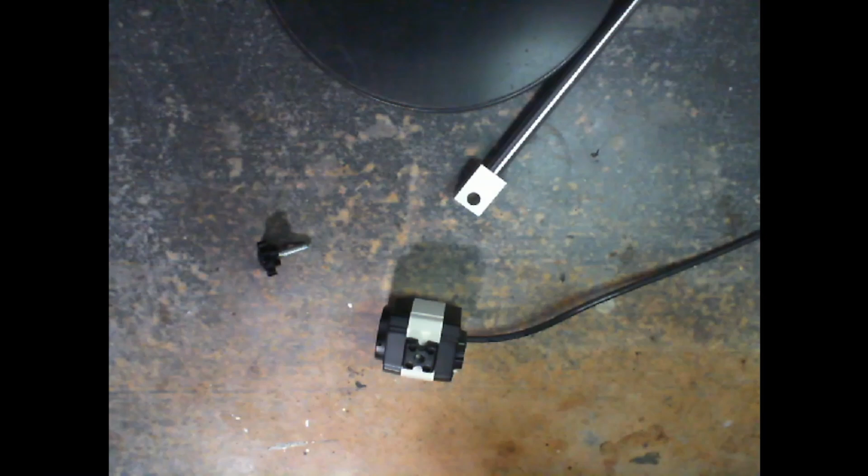In this video, I'm going to be going through how I use FreeCAD and 3D printing to solve everyday problems with my stuff.

My problem here today is that I have this USB document camera, and the way it hooks up through the back, it has to be oriented so the document appears upright. So we have this place to mount it on the back, which is what this stand that came with it was intended to do.

You can also flip it so it's horizontal instead of pointed down at a desk. It has this mounting point at the top, which is kind of intended to be used like that. However, every now and then I'd like to put this on a tripod, like if I'm trying to capture a time lapse of a print, or if I need a camera for anything else. This is my go-to. But if I flip it over, it doesn't have a place to mount on the bottom, so I can't just stick it onto a tripod and call it a day.

I want to make something so that I can attach it through the top and then attach this thing I'm going to design onto the tripod itself. So how are we going to do that?

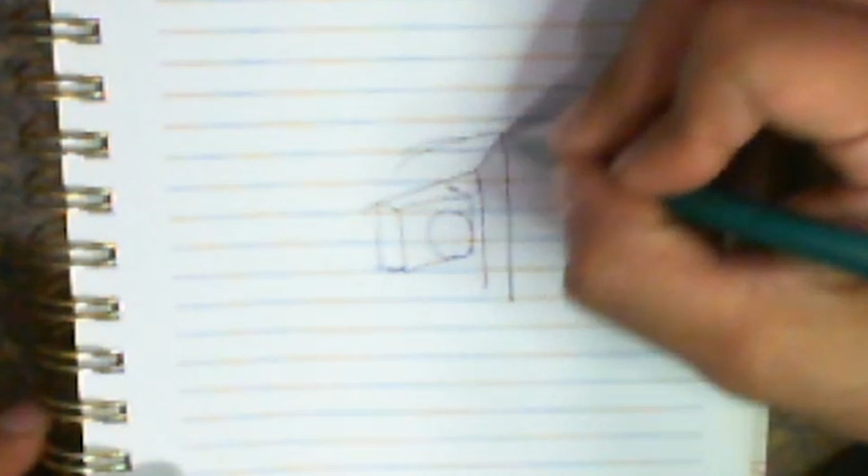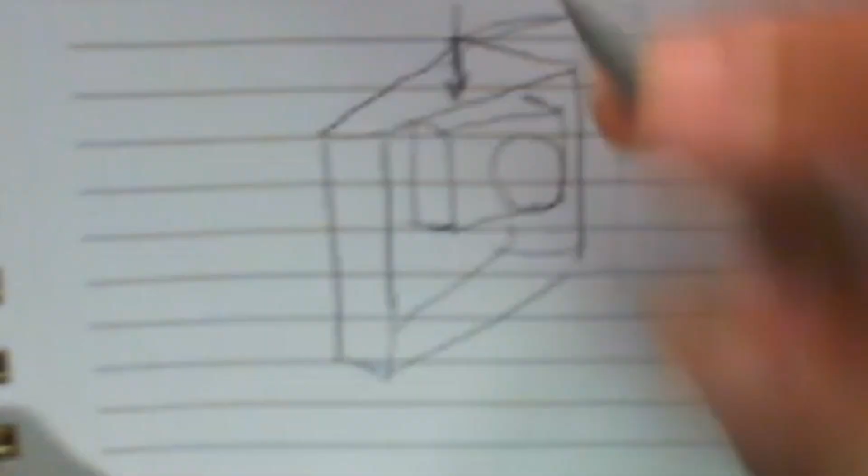Basically my idea is if I have the end of my camera, I want to make a frame that will go around that, just like that. Then I'll have a place to mount my screw on the top, and on the bottom is where we have our tripod. I'll just draw that there.

Let's take some measurements for the camera first. That's the width, I'm going to go 43, and for the height it falls at around 47. For the depth, that doesn't really matter.

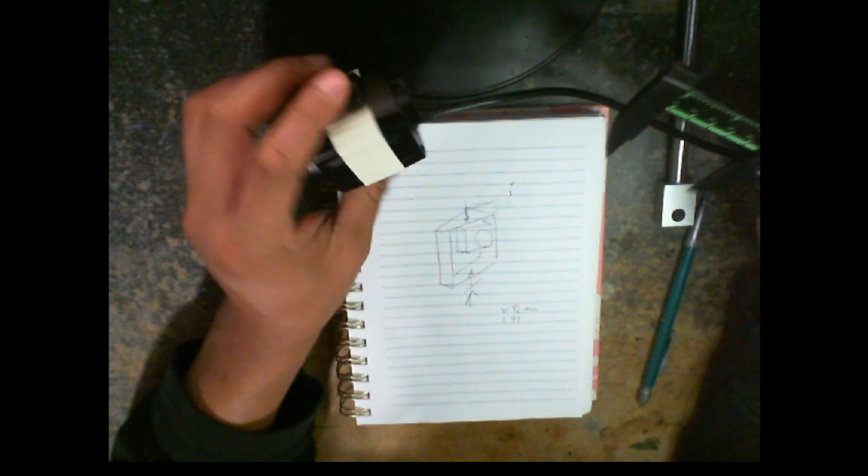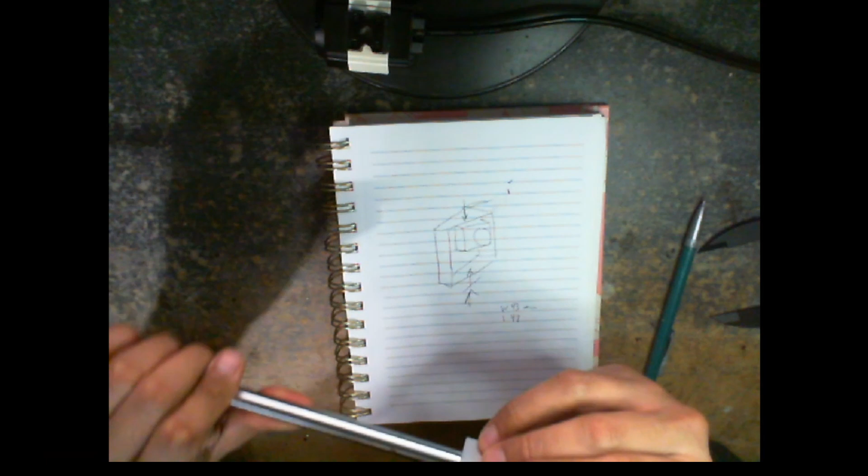But what does matter, and what I'm trying to base it off of so I get the best chance of this being compatible, is this piece right here. It actually looks like it's attached by a hex wrench, but I don't have to take it off, honestly. I can just measure a couple of things here.

I'm getting 19.5, I'm just going to round that up. Then I'll measure the height, and it's about 14.5, or I'll just call it the thickness, actually. The length we'll have to calculate from a combination we'll get to here in a second. I want the diameter of this hole here, which appears to be 8 millimeters.

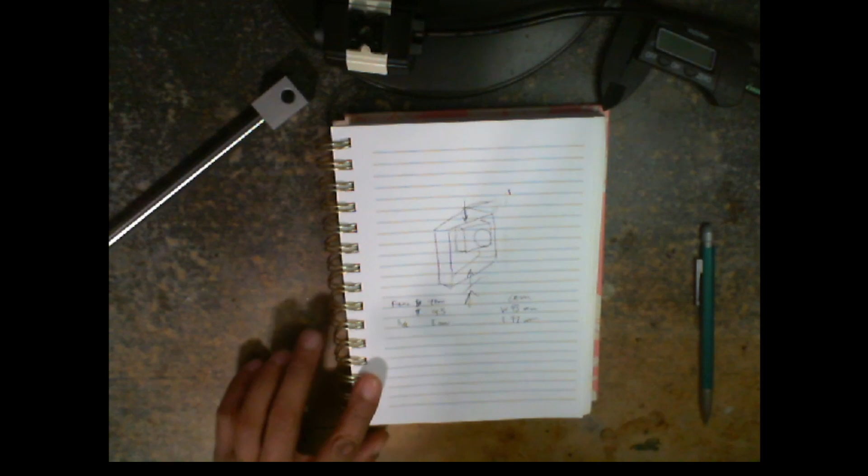With that, we should have enough information to actually start getting this design going in FreeCAD. The first thing we're going to do is go into the Spreadsheet Workbench. So here we have just a blank spreadsheet.

The first thing I'm going to do is start typing out our camera measurements. So I did the cam width, which is 43 millimeters, cam height, 47 millimeters. Then I'm going to come over to this side and do the frame depth, 20 millimeters, and the frame thickness, 14.5 millimeters. The hole inner diameter, please keep note that that's diameter, I'll explain more about that later, and that's 8 millimeters.

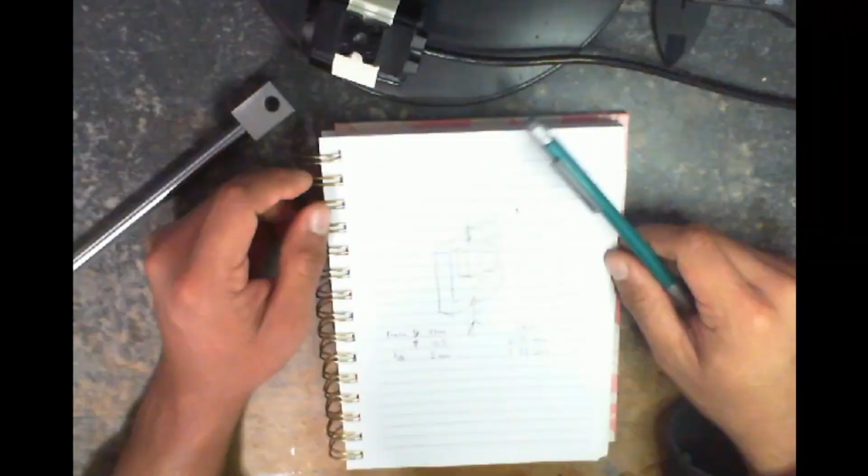Now we can do all of our calculations. And I think it's actually kind of funny, I'm using a webcam right now. I would be using this camera for something like this. I actually almost started recording with this, I almost hit record before realizing, like, wait.

Basically, I want there to be some spacing between this camera and the frame. Just like a little cross section of what I mean right here. So that's where the camera is, and then I just want some spacing all around that. A spacing of 10 millimeters is good. I'll go ahead and add that here. Actually, let me move that here.

Now I'm just going to select all of these, and I'm going to use my easy alias macro. What that does is it turns all of these selected things, and it looks to the cell next to them, and it'll give it that alias, basically living up to its name, aliasing things very easily. Let me go ahead and make my first calculated thing here, and I'll call it the frame length or height.

We're going to calculate this dimension with that spacing. It's right here, and the reason I wanted to easy alias these first was because otherwise I'd have to do something like B2 plus E4. Maybe these have to be caps. You see we get our measurement here, but what is this? If we have to come back and the calculation isn't correct, we'd go back to our part, see something's not lining up right, and have to ask, okay, what's B2?

B2, 47 millimeters, oh, that's the cam height. And E4, which we figure out is the frame spacing, but we're not here to play chess, right? So what I like to do is set up easy aliases, then I can just do cam H plus frame spacing, and you see we get the exact same answer with our aliases without having to hunt for what row and column it's in. We can see, oh, cam H, okay, 47, cool.

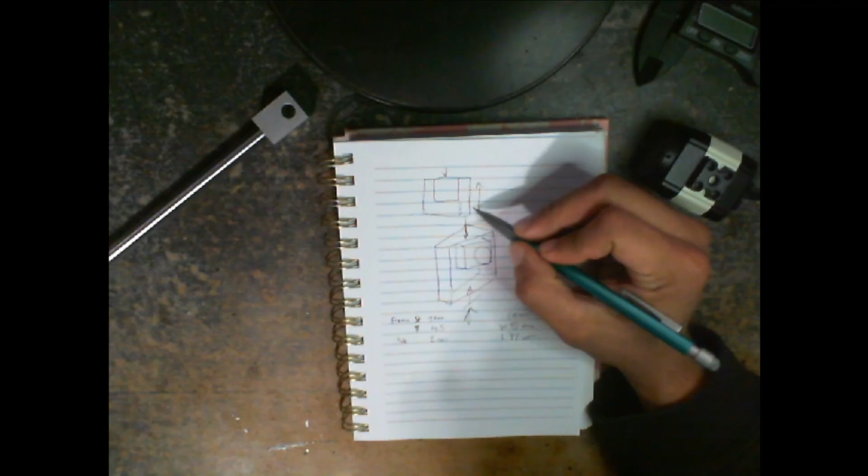So let's do the same thing with the frame width, and we'll say equal cam width plus frame spacing, but I'm going to say times 2. Unlike the height here, which is just 1 times the frame spacing, when we go across these ways we have 2 times the spacing. That's why I multiply it by 2, so it's nice and even on all 3 sides where I'm going to have the spacing.

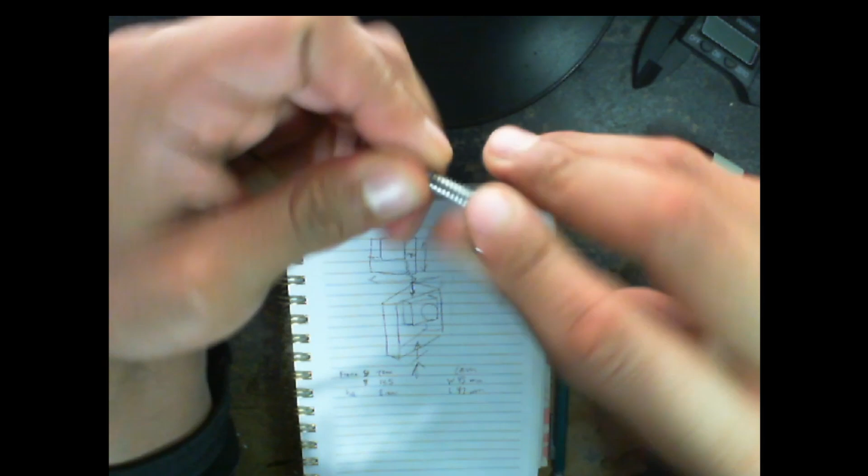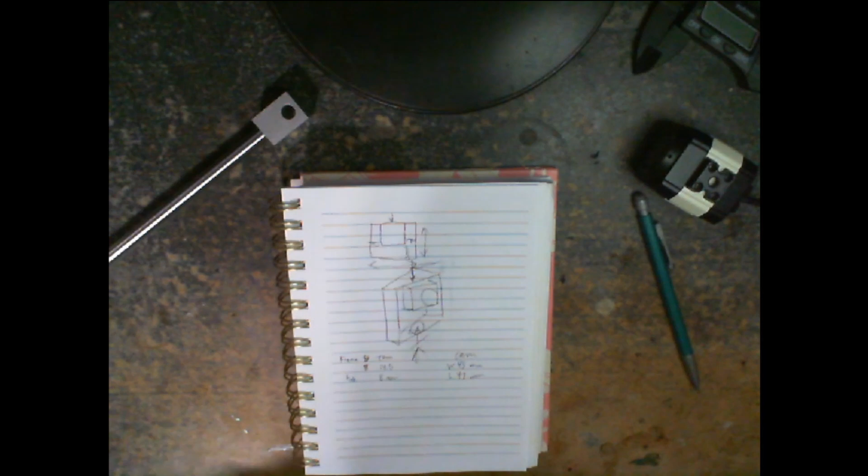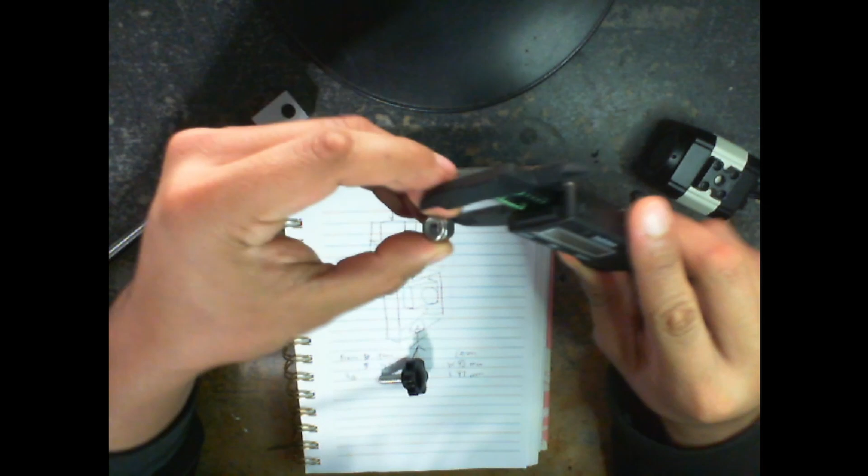One more thing I need is just a hex nut that's going to fit the tripod screw and basically allow me to put this bottom part onto a tripod. This is the threading, so I'm not going to use a heat insert or anything, just this bolt or nut from a kit. I'm just going to measure, so you see I have these straight parallel sides. That's 10.7, so I'll just say 11 millimeters to give it a little clearance. Another thing I forgot is the height, how deep does this go? I'll just say 8 millimeters, it's at 7.8.

So now I believe we have enough information to actually go ahead and start building our object, our little frame. So let's switch over to our part design workbench, and I'll give you a run-through of these tools really quick, because there isn't a whole lot to see until we actually start working in the sketcher.

This is going to be our create body, which I'll go ahead and click now. If I go to our model tab, you can see we have our body, and we'll just leave that as body for now. Then we have the new sketch button, which we use very often here in the part design workbench, but I'm not going to click that yet.

We have different things for creating what are called datum geometry, and I don't really use these a whole lot. I do use these shape binders though, this blue one I use.

Then we have our pad, which will extrude a surface along an axis, like along the z-axis of your sketch. Then you have a revolution, which basically spins it across an axis of your choosing. The additive loft, which morphs between 2 different shapes, but it does have its limitations. A pipe, so you take a sketch, or a profile as they call it, and drag it across that path that you have. An additive helix, basically the same thing as the pipe, except you sweep your profile along a helix, kind of like a screw.

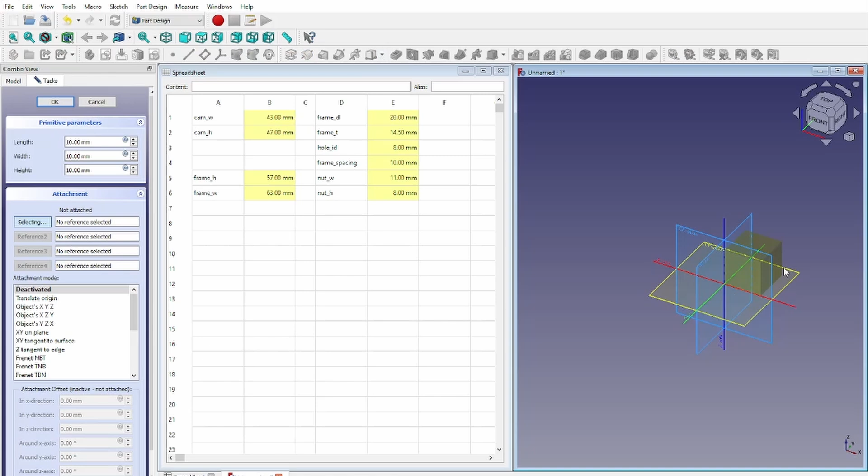And then create an additive primitive. I've actually never done this before, but as you can see, it just creates a box or any of these shapes that you choose. Then all of these blue ones are kind of like the same thing as this, but the opposite version. So with a pocket instead of a pad, you're removing material depending on the length and everything. Hole I haven't actually really used, but I think that just cuts out everything along that sketch. We have the groove, which is like a revolution except it subtracts the material. The subtractive loft is the same thing as the additive loft.

We'll get used to these tools a little bit more. I think for this, I'm mostly going to be sticking to the pad and pocket, but we'll see where this takes us.

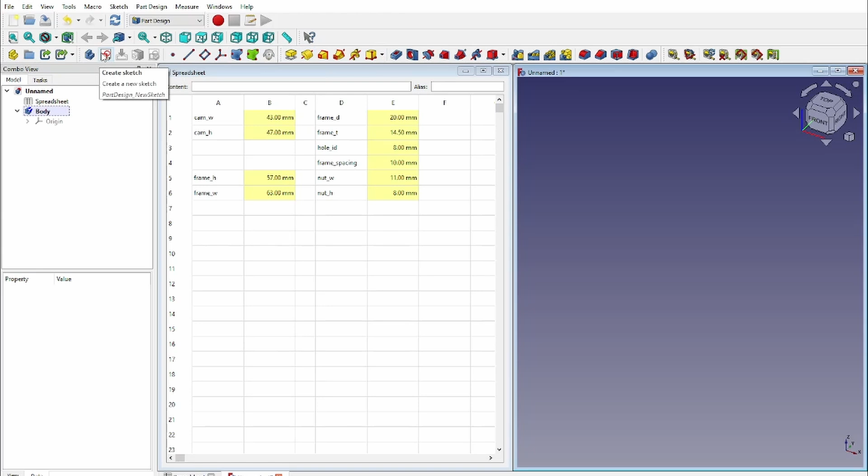Now I'm going to go ahead and hit create sketch, and I'm going to do this on the XZ plane, and you can see that this box says that we're facing the front of our object, which is ideally how I would want it to be.

Before I actually get started here, I'm going to go through and explain as many of these tools as I know. I'm going to really brush past a lot of them. Starting at the top here, I'm going to skip through all these. I really have not used any of these. I think some of these are for the view. Yeah, so set to front view, top view. You can also use this little box right here, which I find myself using a lot.

So the parts that I really care about here are all of these geometry things, and then all of these constraints are the most useful.

So here we have a point, a line, an arc, a circle, which you can change between how that circle is constructed, a conic, and again, you can change how that conic's constructed. This is a B-spline, which I don't use unless it's actually a drastic measure, because these are, in my opinion, really hard to work with.

We have the polyline, which allows you to create any of these by cycling through them using the M key. And then you have create rectangle, and there are different ways you can create that rectangle. I just recently learned about this one while making this video, so I'm going to be using this one a lot, actually, the centered rectangle.

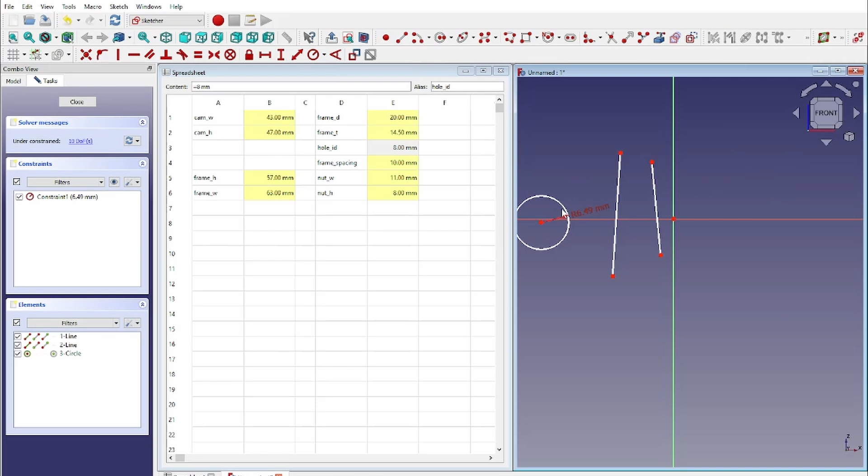And then we have constrain angle. So let me go ahead and constrain radius. Yeah, you already saw that works. And now I can move it around, but I can no longer change its size.

So now we also have constrain angle. So if I were to click here and constrain it to here, I'll type 45, and now you can see that this line will always be at a 45-degree angle to that origin axis.

Similarly, you can hit the toggle button here to toggle the driving or reference constraint, and it turns these blue, because then if I were to click here, you can see I don't get that menu to type in a measurement, because that's just going to keep track. It's going to create a reference so I can see how long a space is without actually having to commit that to the model, or maybe it's a measurement I didn't even make.

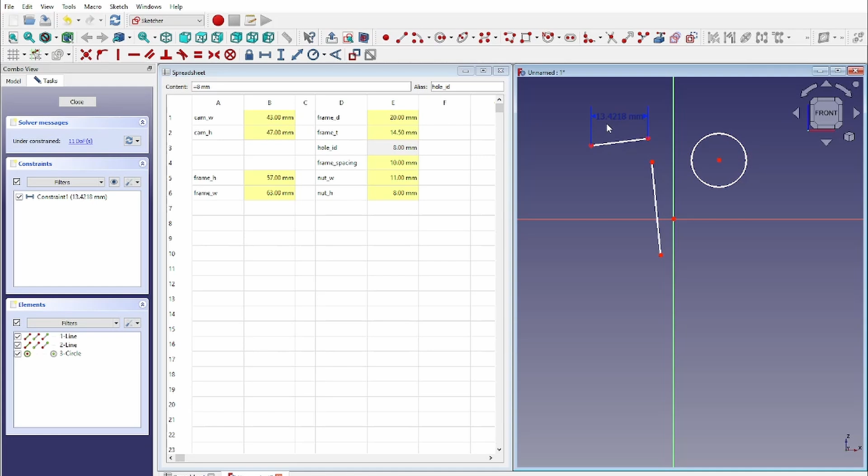Because these constraints, as you constrain your object, you'll see you don't really have to define as much. Those things that you skip out on measuring, you can still have a value for them that you can reference, and that's what those are really good for. So now that all of that's out of the way, let's actually start designing our object.

So I'll go ahead and just start by creating a square, and now I'll use that symmetry constraint that I was talking about earlier. The way you want to use it is just by selecting the 2 points you want to be symmetrical, and then their center point. So now we have a square directly in the center of our sketch.

You can see here under constrained, 2 degrees of freedom, that basically tells us our sketch can still move in 2 dimensions, so that's the X and Y. As you can see here, I'm changing the length and the height, or the width and the height.

So what I'm going to do is create my first measured constraint, and you can see I can insert length, but how do I use all of these values? Because I could just do, okay, well, I know that my frame height is going to be 57 millimeters. Do that, call it a day.

But what if I change this, right? What if I decide that this is wrong and I do want 2 times the spacing, which I know I don't, but for example, now I have to go back in here, double click this and change that to 67. When in reality, what I could do is just hit this blue little button that's hiding up here, and this is our formula editor.

So now all I have to do is refer to my spreadsheet and type in that alias name. For me, it's frame height. And you can see that this grays out because now it's actually chained to a value here. This turns orange, noting that this is a spreadsheet or formula value as opposed to just the measurement. So now I'm going to erase that.

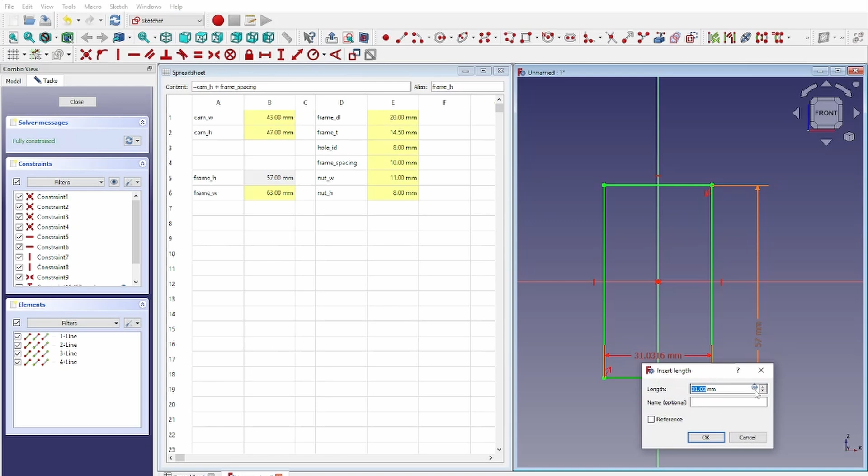Okay, so now we have that updating. I want to go ahead now and create my frame width. And we always have to refer to it by its name or its alias. So this is the name of it right now, and this is the alias, and you can see the difference between that if I were to close this.

I'll just rename this spreadsheet really quick to dims, short for dimensions. And now I'll go ahead and click this constraint again, and now you can see I have dims. This alias just makes it easier to refer to instead of having to type in spreadsheet. But you can see I still do have a spreadsheet here without the angle brackets because that's the internal name of the document. That never changes.

So we'll just go ahead and do dims dot frame W. Cool, and you can see that we have our box shape coming out.

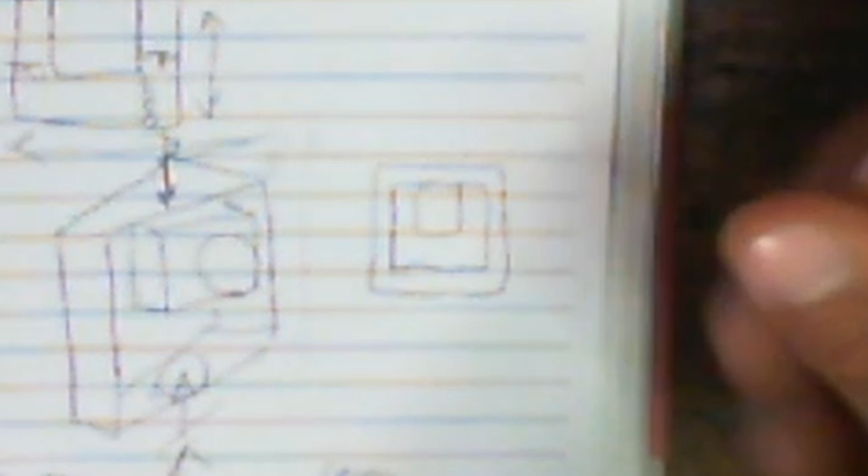What I want to note now is that this box is going to be on the inside where our camera is, so like this drawing right here, I'm going to do it again but really small over here. And then we want to create a border around that, that'll be the thickness of the frame, and that thickness was what we took when we took the frame depth. So basically what we just made right now is this inner box right here.

And we have to be careful with that, because if we created our box here on the inside, we'd be in a world of trouble because that's getting too small for our camera. So we want to be sure we create this box on the outside.

What we'll do is we'll use that same symmetry modifier, and now all I have to do here is constrain a pair of corners. Let me explain that a little more. So here we have the top of this box right here, and then the top of this box right here. All I have to do is select 2 points. It can be this one and this one, this one and this one. Can't be this one and this one. It has to be 1 point from here, 1 point from here.

And we'll do dims dot frame depth. And there you can see we're constrained there, and because it's symmetrical, this side won't move either. So now I'm going to do the same thing but with a horizontal constraint on one side. Dims dot frame depth again. You can see we have our box.

This is one really cool thing that took me forever to learn about FreeCAD too, is creating a shape around a shape, or like a shape within a shape, and this interior, like between the two shapes, is what acts as what turns into the mesh. So I can close this here now.

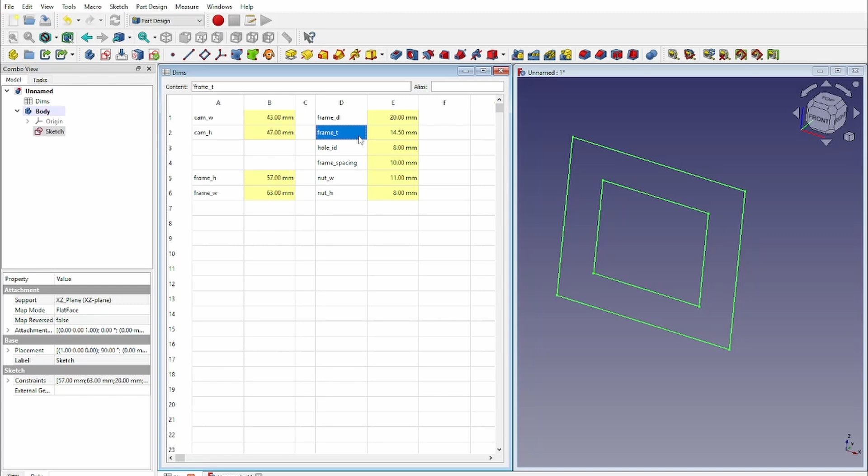Let me remeasure this really quick because I think I was actually supposed to use the thickness. So no big deal, just go back into my sketch here, frame thickness, frame thickness. So now I'm going to go ahead and use our pad tool.

I'm going to make this symmetric to plane because you'll see here there's, you can imagine like an axis here, like this is the Z axis where it's resting right now, and when I make it symmetric it'll make that in the middle, right? I mean, that should make sense.

I want it to be in the middle because that's just going to make it easier to align everything else that I'm going to do for this project. So here I'm going to go do dims dot frame, and this is the depth. Perfect, we have this all figured out now.

We want to create the hole for this to go into the top, and then we want to create our hole for the nut to go on the bottom. But I'm not going to do just simple circles, because the nature of 3D printing is such that circles just don't like to print, and I've learned that the hard way. I've been stubborn, but I've finally given into using hexagons or some kind of more angular shape to kind of reduce the lip, so to speak, of that hole.

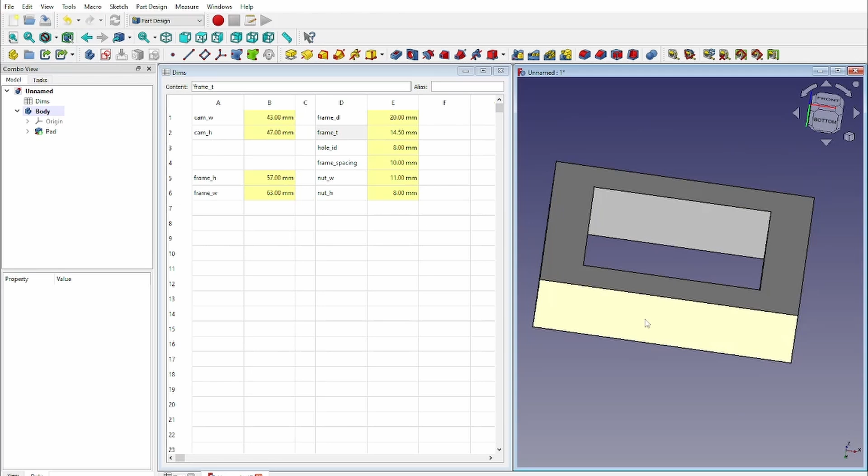So let's start by doing this hole on top. Or let's start by doing this on bottom. Now what a lot of people like to do is they'll click this sketch, or they'll click a face, and then they'll create a new sketch, and you'll see what that does is it anchors your sketch to that plane. But I feel like that leads to, I mean, it makes sense, it's intuitive, don't get me wrong. I could do this, create my circle, or I guess in this case it's going to be a hexagon.

So I can do this. I can create my hexagon. We'll just say yes, it's constrained, and then I'll create the hole, right?

But I've heard that a lot of people have issues coming out of doing it this way. So I'm going to show you the way that I do it, and I will explain. It just kind of makes it easier when you create everything without a reference to each other. When you change parts, as long as everything's parametric, it works really well to do it this way.

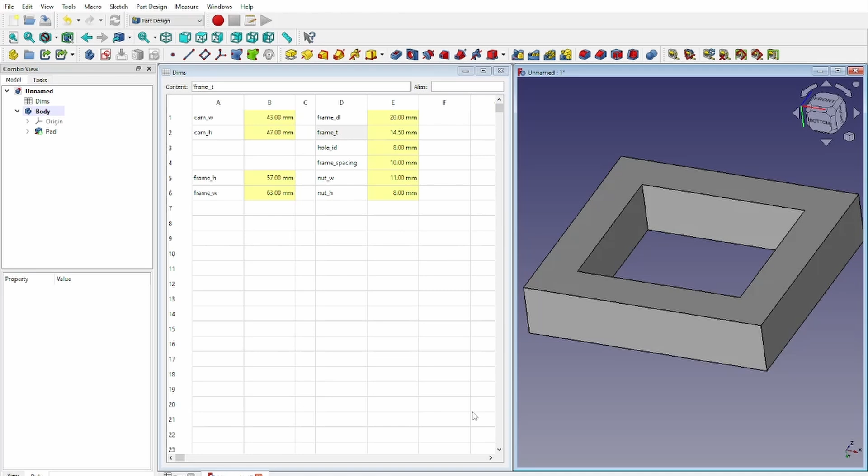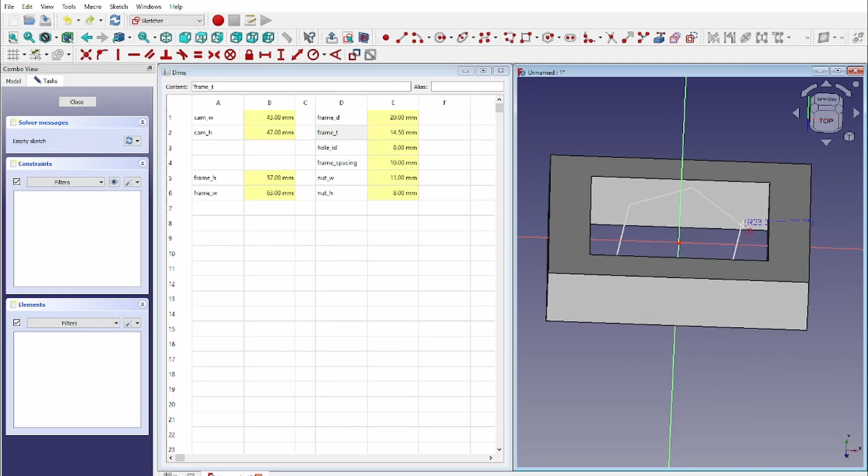So what I'll do is create another sketch, basically floating in midair. I'll put it here on the XY plane. And as you can see now, I can still create stuff, but it's appearing underneath this object. If I click here, you can see that's where it is. But in order to see through that while viewing it from the top, you just hit Q and S, and that'll create a cross section for you.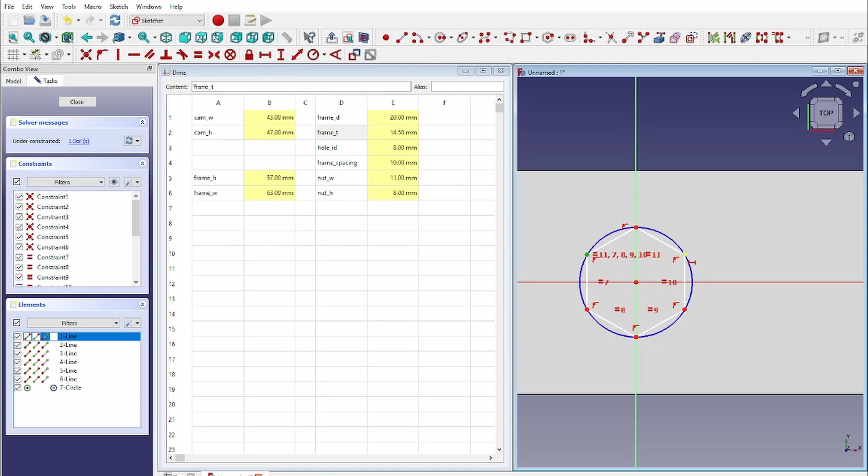And now I can go through and create my hexagon, and if you remember from the measurement, it was from here to here. So I'll create my horizontal constraint from here to here, and we're going to do dims dot nut width. There we go. That basically is it for that one.

But now you can see that this shape is just hovering in midair, and I can cut through all the way to the bottom, but that's not really going to work for me because this nut has a specific height to it, and I don't want it to go any deeper, because if it ends up deeper and stuck there, the tripod thing won't screw in, right?

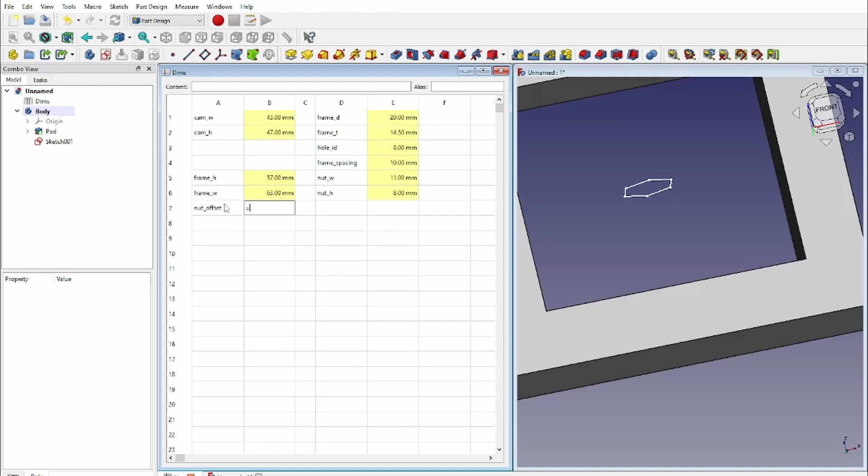So I want to place this onto the bottom side here, and I will do that by creating what I call an offset variable in my spreadsheet. I'll call this the nut offset, and I'm going to set it equal to the frame height divided by 2. The reason for that is because this is the whole frame height right here, from beginning to end.

If we divide it, actually it'll be the interior here. So if we were to add that straight into the bottom, we would go past this. So we would have this distance, but right here dividing it by 2 makes sure that we end up here at the bottom, and I'll go ahead and show you that really quick by giving this a name.

And then on the attachment here, I'm going to do negative dims dot nut offset. And there you can see that it's already updated to show me that it's at the bottom of that frame, but I don't want it to be here. I want it to be here at the bottom and then push up these 8 millimeters.

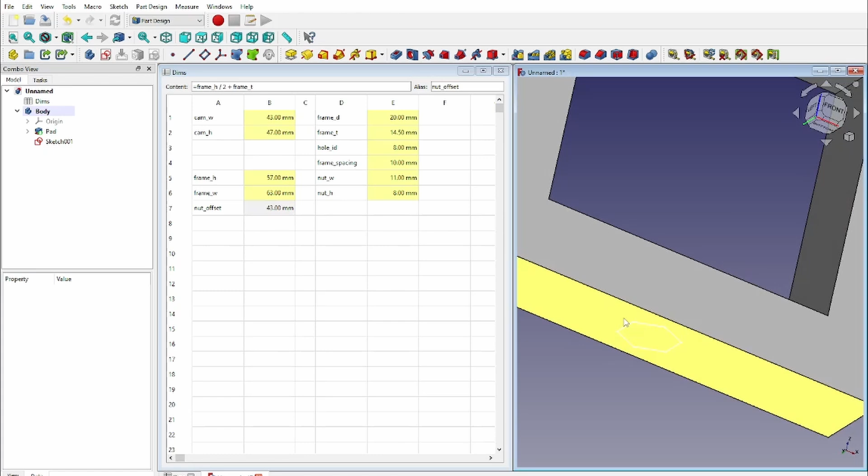So I will go ahead and add to my formula plus the frame thickness. You see that brings us to 43 millimeters, and we are resting now perfectly on the bottom. So that's where I'll go ahead and hit my pocket tool.

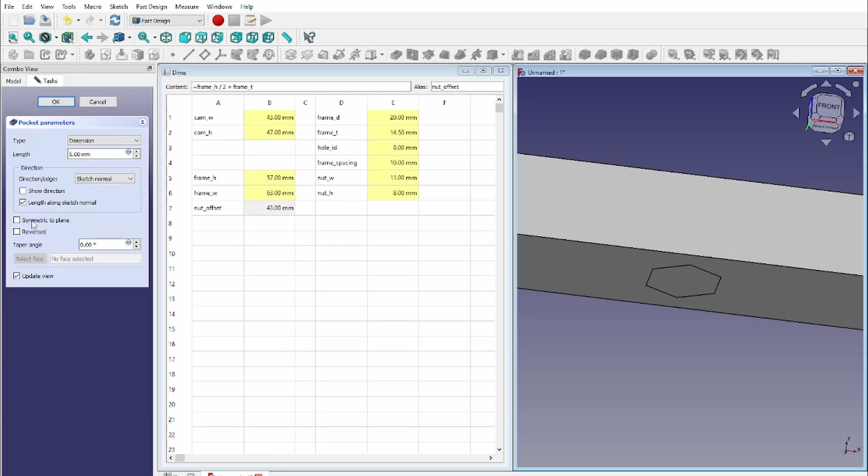I'll have to reverse it because naturally a pocket wants to go negative on the z-axis of your sketch. Maybe that's something I'll get into another time, like what is the z-axis for your sketch? It depends on what face or what plane you make your sketch on. But I'll go ahead and reverse this, and for most things you'll see there's a blue button. If there's a blue button next to it, you can attach a formula to it.

So here on the pocket parameters, I'm going to go here, hit the formula editor, and do dims dot nut height. And there we go. We did that one. Perfect.

So now we're going to do the hole for the attachment at the top. I'll go ahead and hit new sketch on the XY plane. Again, Q S to make a cross section. And this one's going to be a little bit different. Let me tell you why.

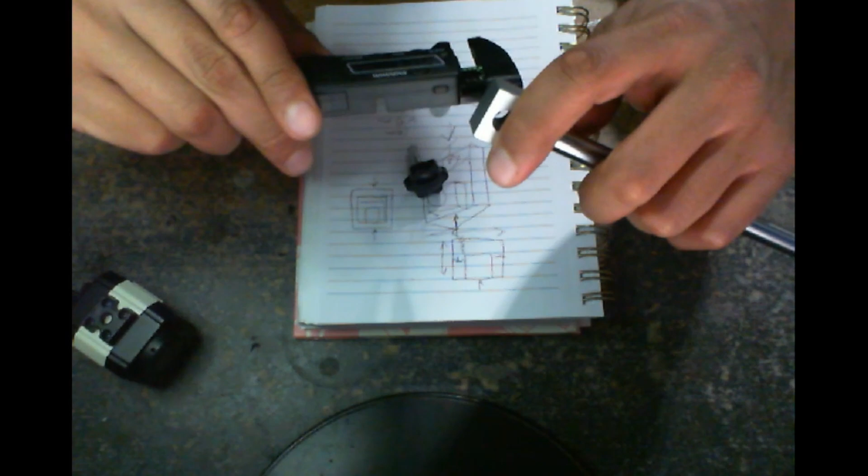Here we have a circle, no doubt about that. That circle is about 8 millimeters in diameter. The problem is that circles are kind of not preferred in 3D printing, especially since I'm going to be printing my frame sideways, and printing this circle upright like that is not going to be very pretty. It's not going to look good, and at the end of the day this screw might not even fit in there. So what I'm going to have to do is make a hexagon whose edges are tangent to this circle, so that this thread will fit through.

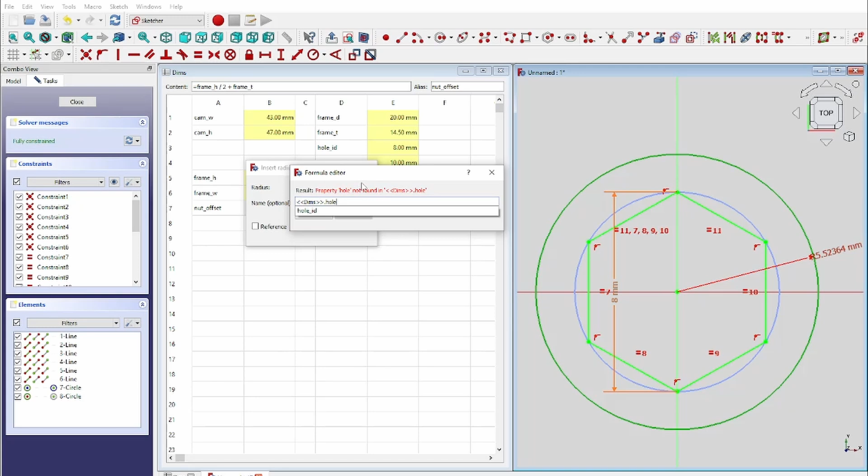I just realized I wasn't recording my screen, so we'll do that again. You can see I created this circle here, and I'm going to constrain its radius to the inner diameter divided by 2, using the radius constraint. Here's the problem that pops up: this circle is now exactly the same radius as the circle helping us define our hexagon. So naturally, if we came back here, this thread won't fit at each of the sides that hexagon makes. In order to combat that, I'll erase this constraint.

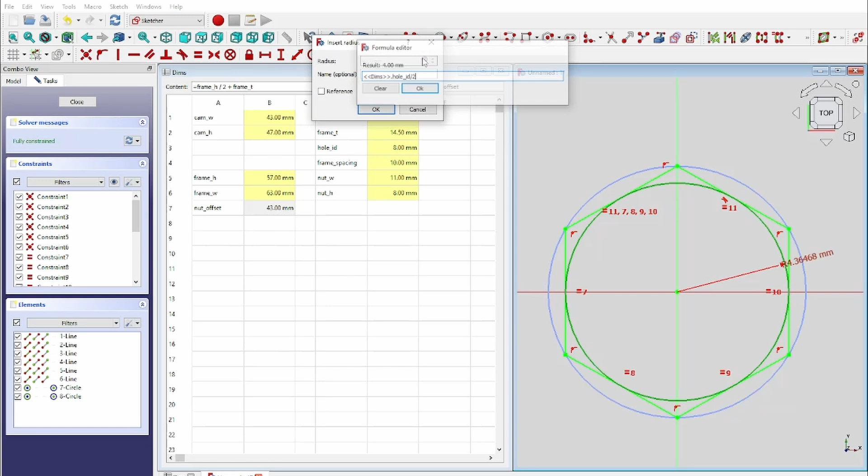I'll size this up, and then use my tangent constraint to make those tangential to each other. You can see it kind of aligns the whole circle now, so we don't have to worry about that. You can click any white or blue geometry and then click this toggle button, and it toggles it to construction geometry. Now I'll constrain that radius to our dims.hole ID divided by 2. And bam, now we have a hexagon that will fit our thread.

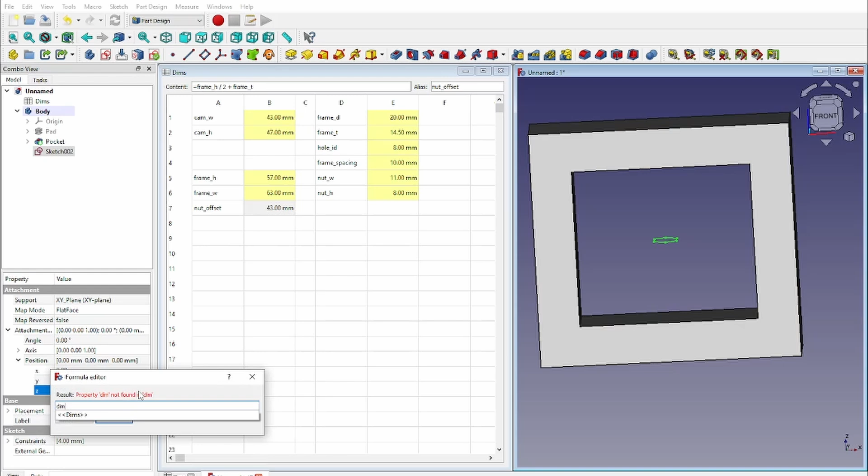You can close that now. The funny thing we've done here with our bottom hole, by creating that offset, is that the offset is exactly the same from here to here. So I'll go into the formula editor, but instead of negating it, I'll just do the nut offset. Bam, we end up there.

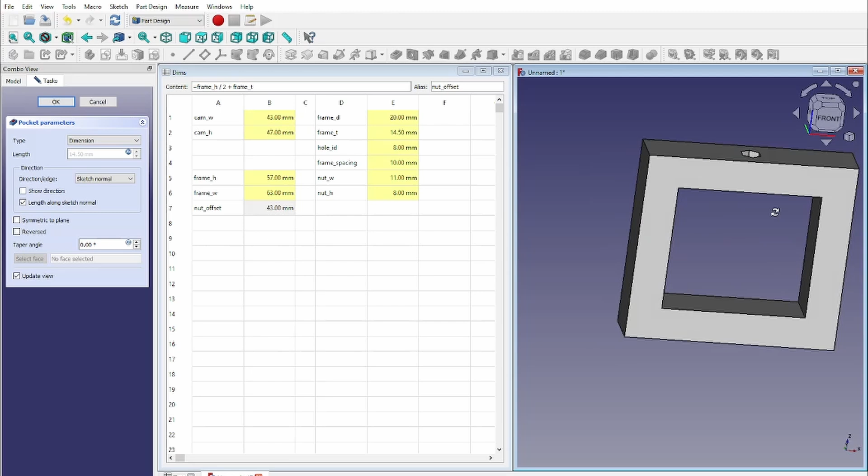I'm going to create a pocket, and its length will be our frame thickness, and it goes all the way through. Perfect, so this is basically ready to go, ready to print. I'll go ahead and hit OK there. I just want to give this a little more of a refined look.

So I'm going to go ahead and start control-clicking, on Windows, all of these corners, trying not to select any faces. Got everything. Now I'm going to create a fillet here—I haven't gone through what all these tools do, but we could cover that in another tutorial. I clicked this one right here, the fillet tool, brought it up to 11 millimeters, and that's looking nice and good. I'll go ahead and hit OK.

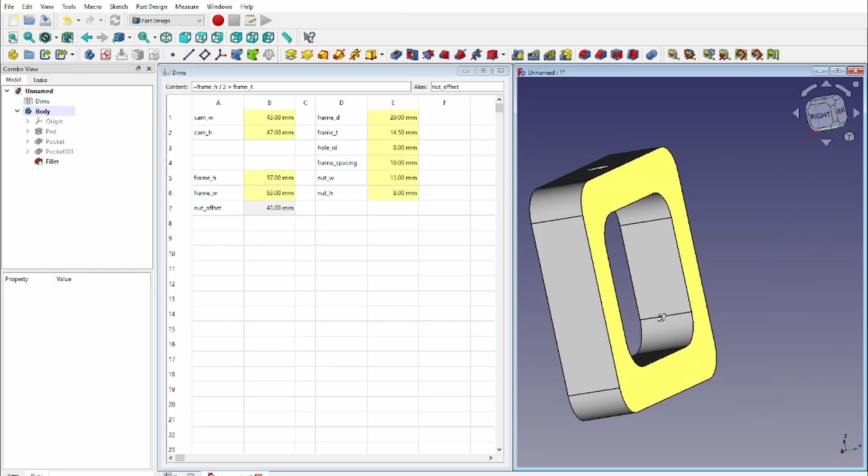All right, I'll go ahead and export this, send it to my printer, and we'll see how it works. As you can see, it fits perfectly, and I have absolutely no complaints.

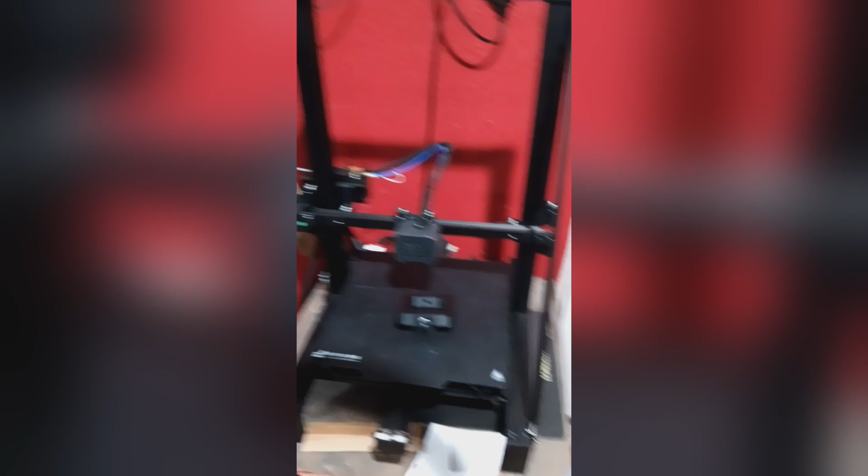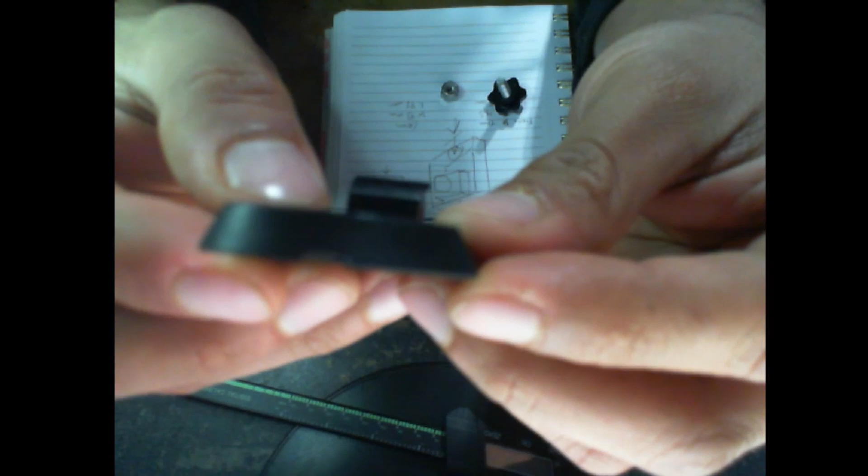This thing is tripod-ready for now and for the foreseeable future, but I have another problem: the tripod I want to use this on doubles as a ring light, so I'm not recording in total darkness. But it has this shoe, meant so you can take your phone off the ring light and attach it to a tripod if you wanted, but that's not at all what I'm going to be using this ring light for. So now I want to design a new piece that will fit this shape—it's got an interesting little trapezoid profile there.

So one of the things I'll have to do is figure out what that angle is, to the best of my ability, to make a piece that fits in there and is extended so it fits the width of that frame, and then also so I can screw it down from the bottom. Let's do width, and I'll just go ahead and say 31.7.

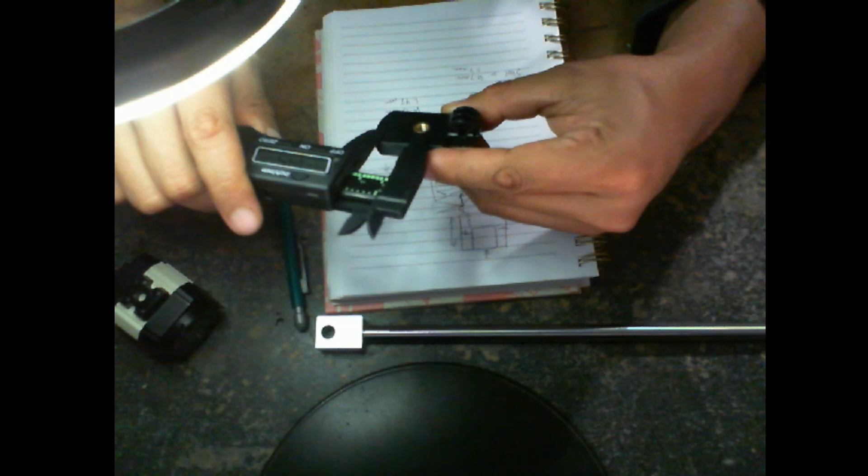Then the height, we'll do 5.7 as well. And what I want to measure here is how long it was from here to the edge, since I made a mark I can't really see anymore. It seems to be about 22 millimeters, so we'll give myself another 8 millimeters of clearance to make sure the frame has as close to zero chance of connecting to that as possible.

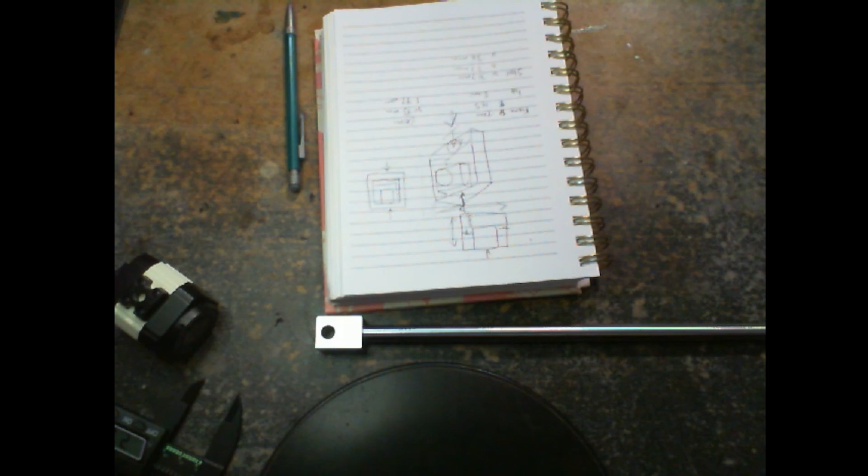I actually have to get the angle here really quick, but that is going to be a problem because I don't know enough trigonometry to start putting that together. I have this protractor, but I really do not think this is going to help.

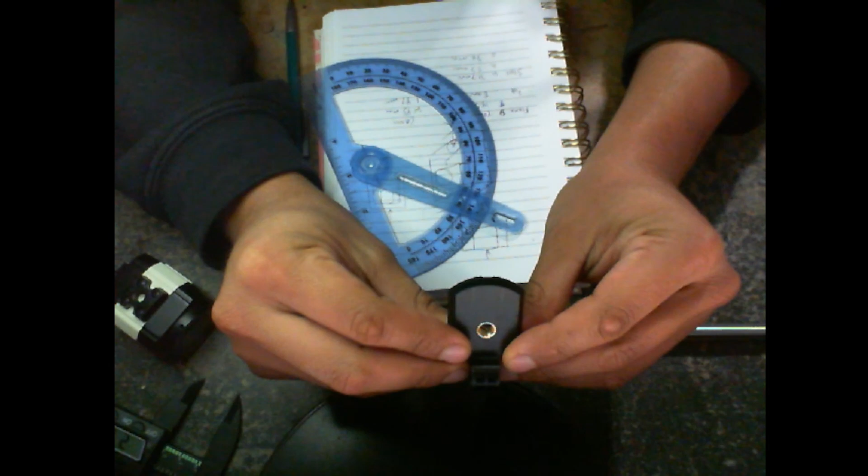So what I think I will do is take a picture of it, send it to my computer, and then we'll see if we can find the angle from there.

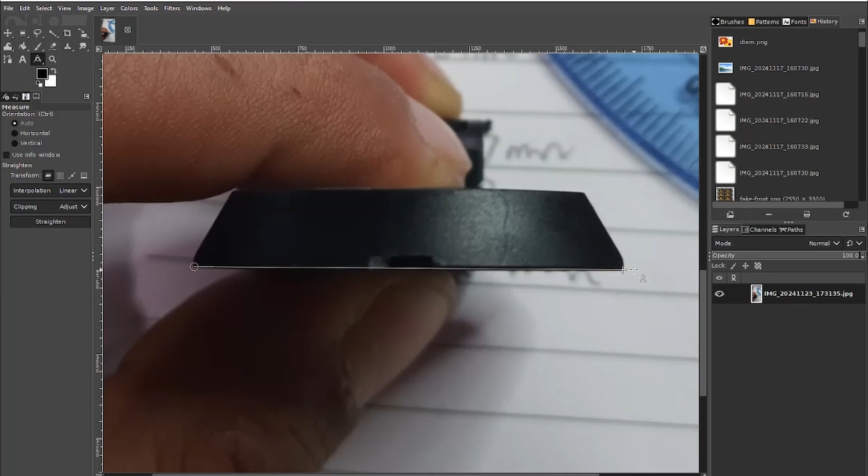So I now have my image open in GIMP. I will rotate it, and here's the picture that I took. So basically what I want to do now is stretch to each point here, trying to get it in a consistent location.

And with that, we have enough info to keep working here. So I'm just going to go ahead and add my shoe measurements: width, height, and I'll just call this the spacing, the clearance.

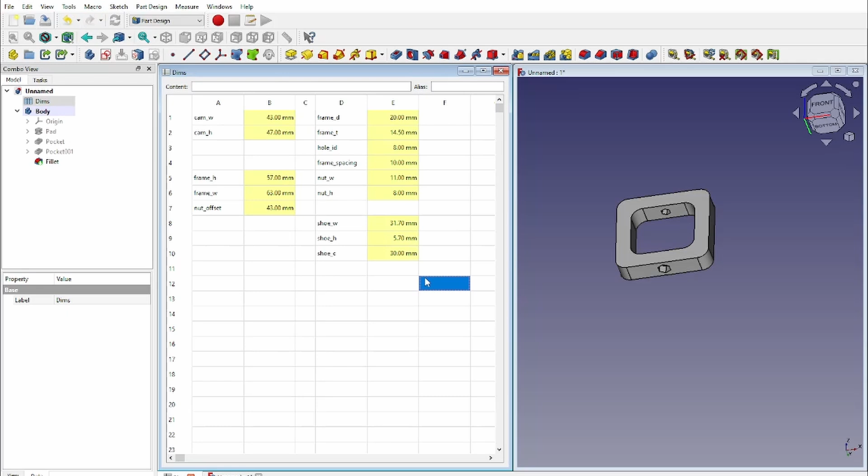All right, so now go ahead and easy alias all of that. Oh yeah, you've got to make sure that's selected in your hierarchy. There we go, I think that really should be enough.

So I'll go ahead and create another body, the shoe. I'll create not a body, I'll create a sketch facing forward like that, if I can.

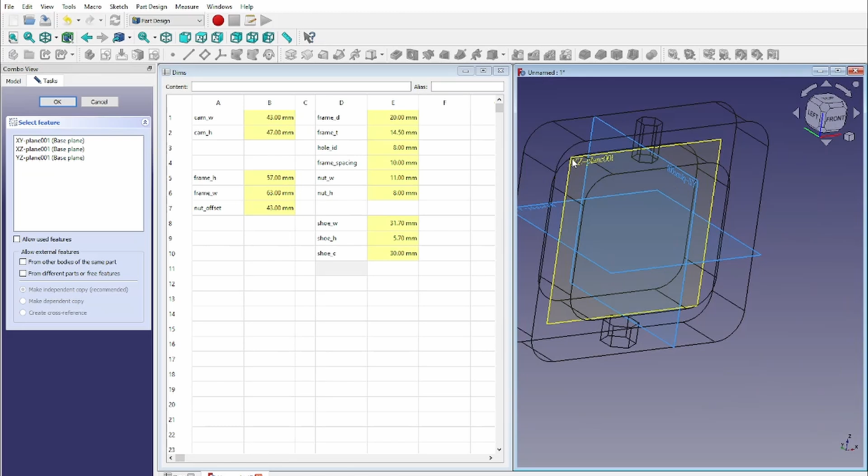Sometimes if you have intersecting geometry with the planes, you can hit V3, turn everything into a wireframe, select it, and then go back using V1.

So what I'm doing now is actually creating the profile here so that I can include that angle. What I'm going to do is select the polyline tool, and you can see it allows me to create a rough profile. That's actually pretty rough, but there we go.

Now I've created this profile for my shoe, and actually what I'm going to do is delete that. This just kind of makes it easier to align things evenly, so I'll hit equal there.

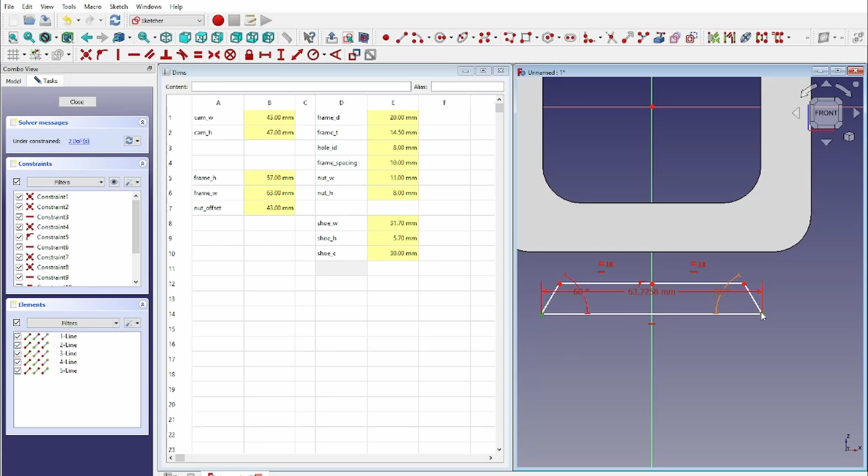So if that's 30, then 90 minus 30 would be 60, so this is going to be 60 degrees. Same with that. Now we just want the width of this to equal our shoe width, and we want our shoe height.

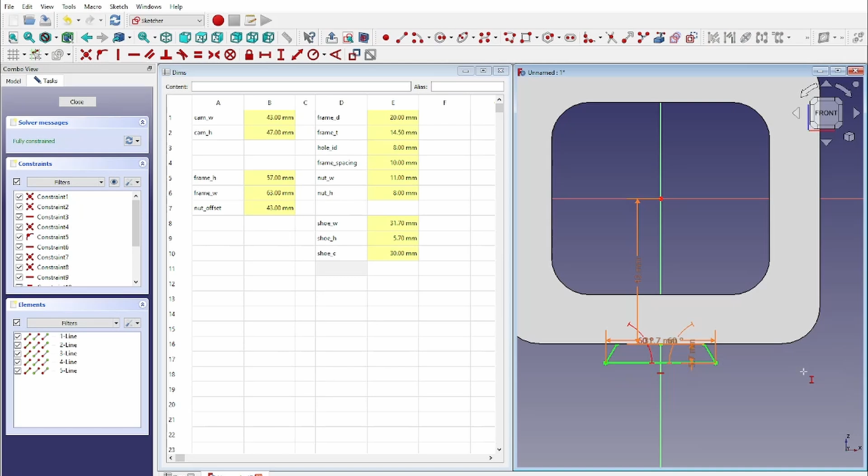Alright, and now the only thing that's left, our last degree of freedom, is going to be on this axis here. So to kind of keep in the spirit of things, I'm going to move this down here by the nut offset. That's going to put us right where we want to be on the bottom of that. I'm going to go ahead and close that.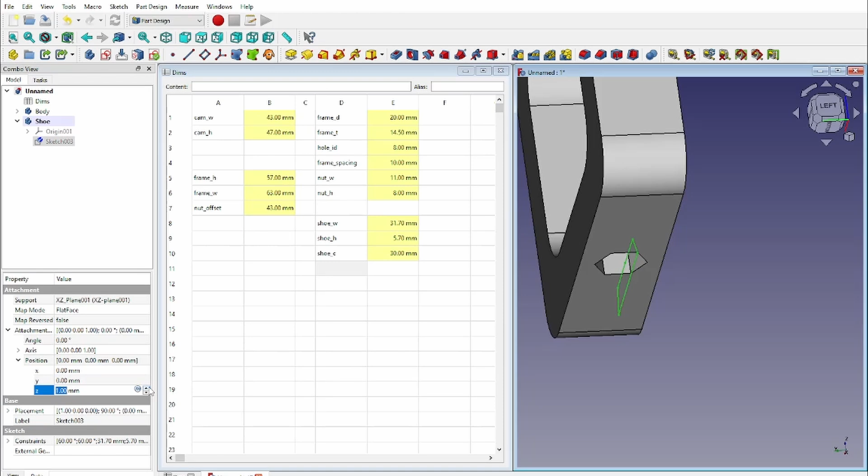And now I'm going to further position this so that it's on the edge here. As you can see, this is where that Z talk kind of comes in, where I was saying the Z is dependent on what axis you made it in, what axis you were drawing. So whenever you draw something in a sketch, you can assume you're looking, even though it says from the front here, in respect to this sketch, to this geometry.

When you're making this sketch, you're looking from the top down. So you can see when I hit Z, even though we made it on the XZ plane, we're technically moving it forward on the Y axis, on the positive Y, or I guess the negative Y if you're paying attention to this little thing here. It's moving on the negative Y because of how we were looking at that sketch. So this is just kind of like a little tip that I wish I knew. You'll see if I use the Y here, that's what moves it up and down according to the base coordinates, so just something to keep in mind.

I'm going to make this by the frame.

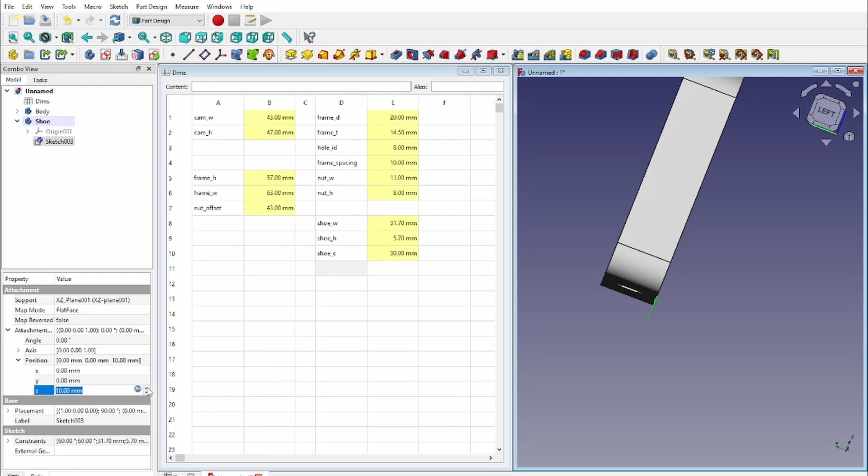Don't forget to put your spreadsheet alias, and then the frame depth divided by 2. And that's going to put us right there at the edge of that. Perfect.

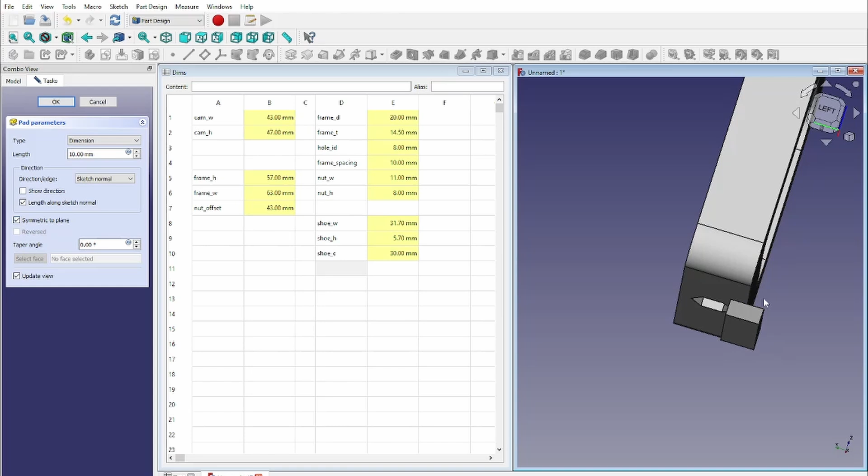Now I'm going to just pad it out. You can see it's going the opposite direction that I want it to go, so I'll just reverse it. I won't hit symmetric to plane because that's going to offset things and it's not going to work out very well. I already have it aligned out to here at the end, I just want to reverse it so that we're going from out in.

I'm going to hit OK for now because I want to come back to my spreadsheet. I'm going to say shoe underscore length, then set that equal to the frame depth plus the shoe clearance, and that gives us 50 millimeters. I'm just going to call this shoe L. Oh, wrong box.

Okay, now I'm going to go back into our pad, double click that, and in our formula editor I'm going to say dims.shoe L. That's looking okay.

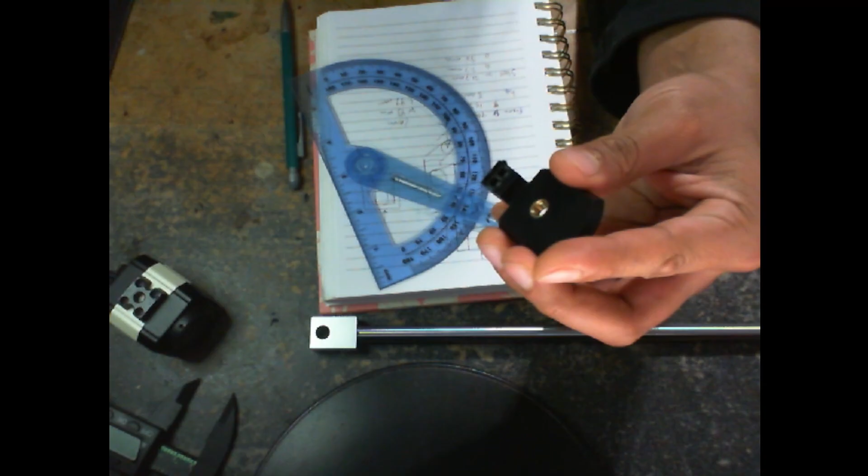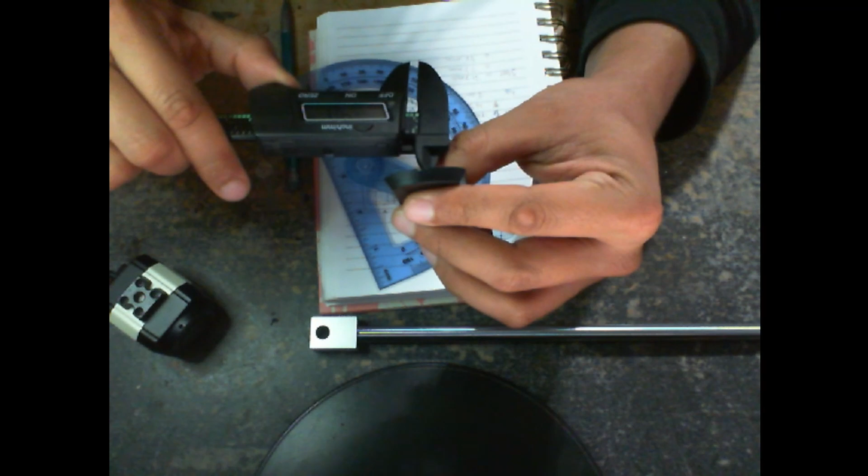But it also has this little slide here at the bottom that is, I believe, 1 millimeter depth here, and then this is 4 millimeters wide, about 17.5 millimeters deep. Wow, I did not record any of that.

Wonderful. Okay, so our dent offset is going to be the distance from here to the nut offset plus the shoe height. So let me go ahead and say equals nut offset plus shoe height.

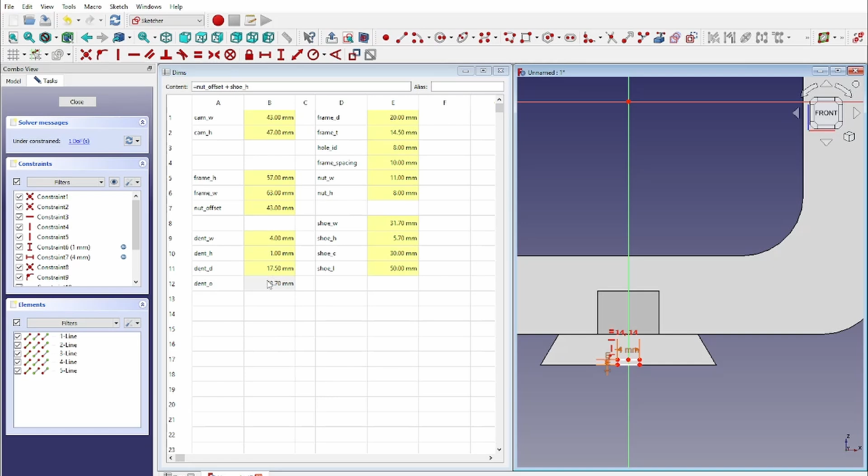And we'll go back in here, select those 2 points from the center origin here to one of these 2 bottom points. I didn't alias it, so I'll do that really quick. Okay, and then just to recap, I just created this box here, and then I deleted this edge and replaced it with 2 lines.

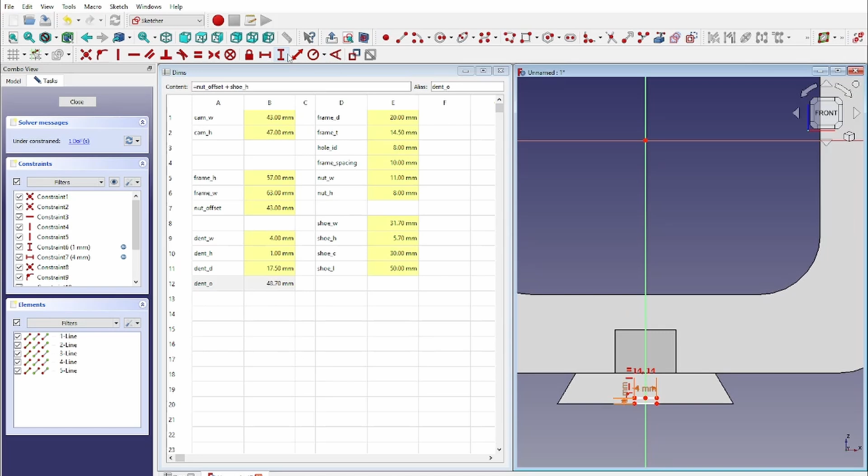And made them equal, and then I made this the dent height here, this the dent width here, then we just made the dent offset, which is what we are going to attach here from the center point to one of these bottom points, and we'll say dims dent O, and that will bring us to exactly the bottom of that section.

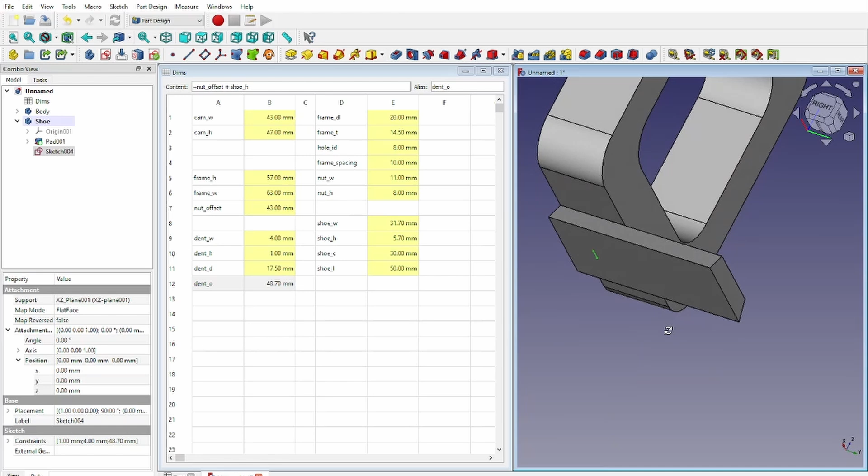And then we want to bring it from this center point to over here, because that's where it goes, and that's going to be this half of the depth of the frame plus the spacing. So we'll just say dent placement equals the frame depth divided by 2 plus nut offset. And again, I know you're going to tell me that just clicking this and then making my sketch from there is going to be easier, but I prefer working this way.

I've had not nearly as many errors as other people have had working with this stuff, so I'm going to keep it that way. dims.dent p, and you can see it brings us all the way out over there because that's on the positive axis.

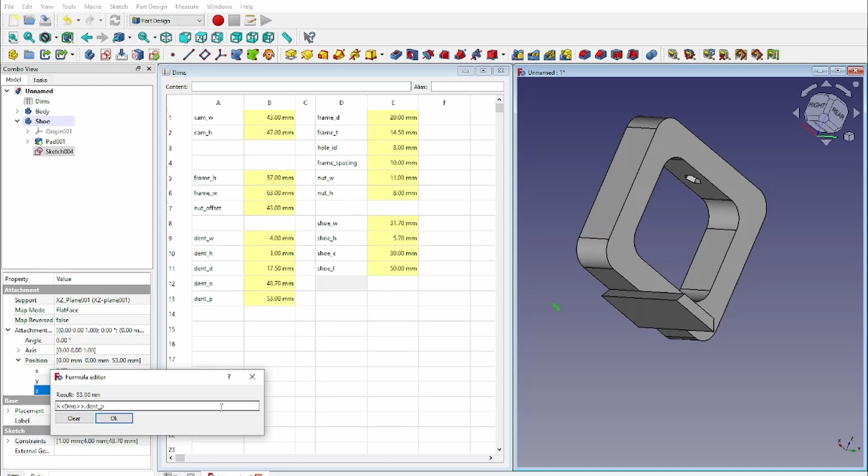We want to go negative, and as we can see, it's a little too far. So what's going on here? Frame depth divided by 2 plus nut offset. I don't know why I did that. It should have been plus shoe clearance. Not sure what happened there. My brain wasn't doing that for a second.

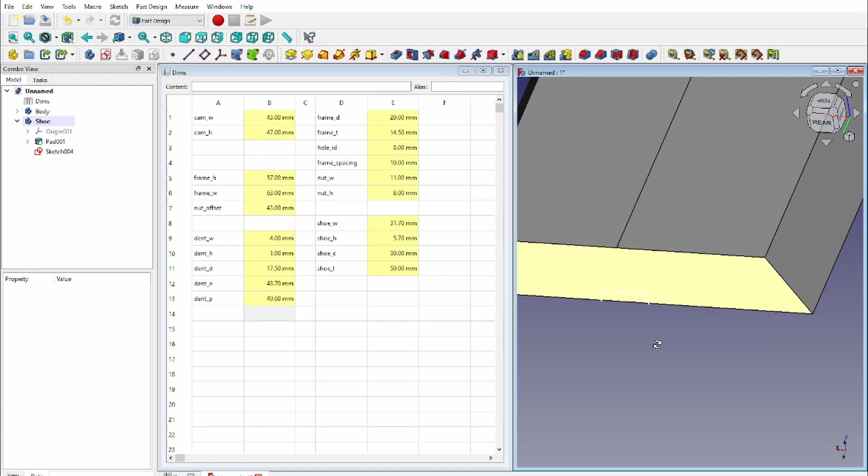Okay, cool. So now I can go ahead and make a pocket, and it'll have to be reversed. You'll see because it goes in now. And I'm going to make this length the dims.dent depth.

So this is actually going to be probably the easiest part of the shoe. And actually, let me go ahead - I'm really playing with fire here, playing with matches here. I'm gonna call this the frame cam frame shoe. Okay, I'm gonna go to the plane XY. Just to keep with the aesthetic of everything, I'm going to do another hexagon.

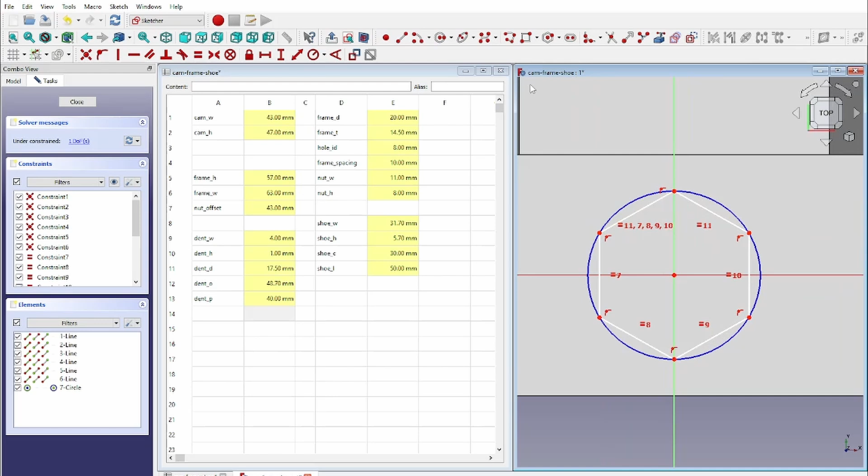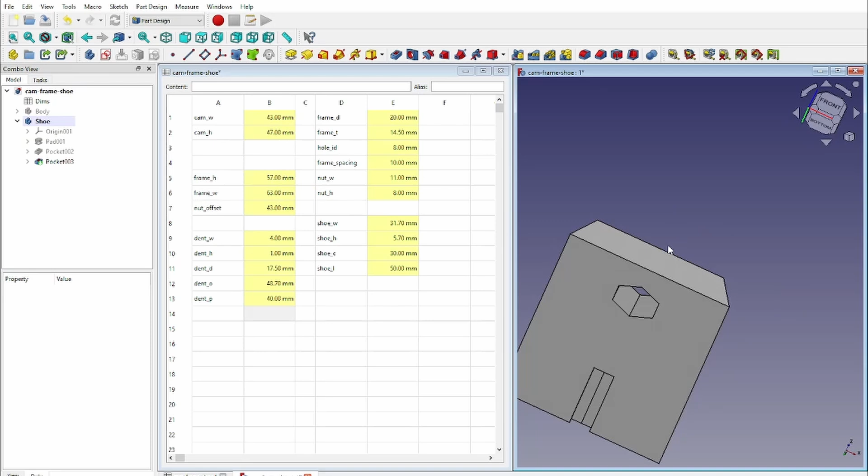I'm going to do this. We're going to put this on the Z, negative, dims, nut offset. And we could pocket it by the shoe height. There we go, we have a little shoe that we can try to use here.

I'm going to go ahead and print this out and we'll see how it goes. And here we have it. Everything worked perfectly. And now I have a decent camera for time lapses on my 3D printing.